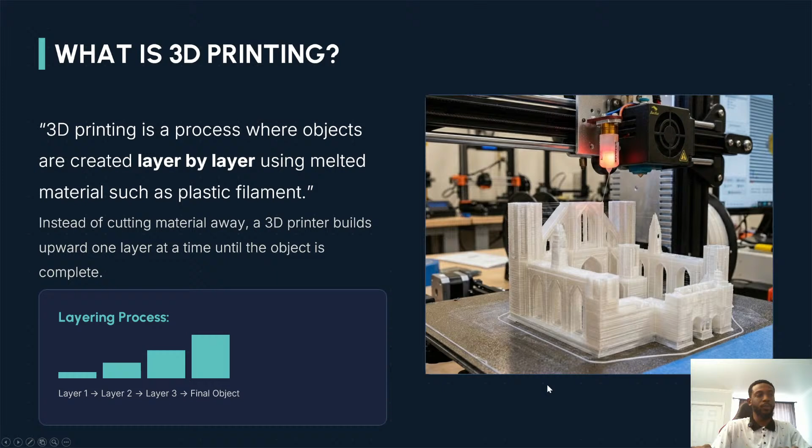So now we'll be talking about the various parts of a printer. This might be a little bit complicated, but I'll try and keep the explanations as simple and easy as possible.

So first of all, we do have the frame. The frame is what we call the structural support. The frame is also known as the structural support that keeps the machine stable and reduces shaking during movement.

And then we also have the Z axis, and the X axis and the Y axis. This simply means, so when I talk about the X, Y, or Z axis, think of it as motion, movements, or positioning. That's how the 3D printer moves.

So the X axis, this part moves the printer's head left and right. So that's what we're talking about here, it moves the printer left and right. And the Y axis moves the printer forward and backward. Just think of it that the X axis is left and right, and the Y axis is forward and backwards.

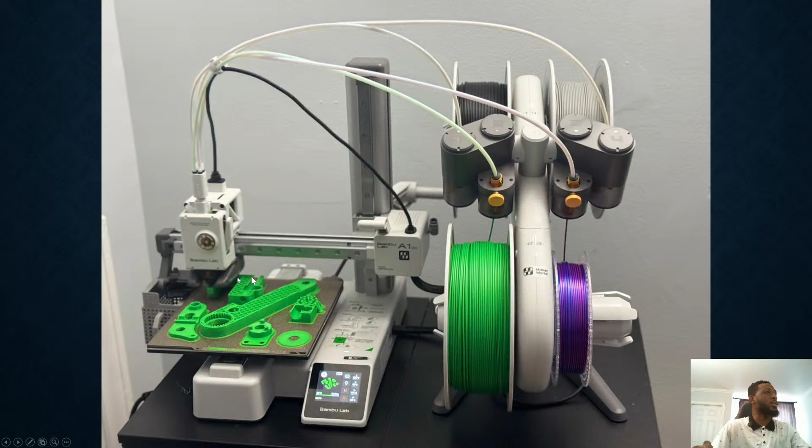I can show you a much more detailed picture of this. This would be something right here. If you can observe it, you can see the nozzle right here. This is the current printer that I am using, it's the A1 series. As you can see the nozzle a bit from the side.

So the printer that extrudes, you can see the green filament I'm using right now going through the tube guide, and it's going to be melted at the bottom here to make all of these parts that I'm going to assemble later.

So next we can talk about the heated bed. So when I say the heated bed, I simply mean this, the base, that's the base of the printer where the object is going to be printed on.

The bed actually changes temperature, which makes it easier to print and melt the material. Also makes it easier to take off the material when it's done.

So the bed is the flat surface where the object is printed on. If it heats up the plastic, it sticks properly and does not lift up or warp while printing.

So if it heats up properly, if the temperature is set to the correct degree, it sticks and makes the object adhesive to the base, because there's a lot of volume shaking and movement from the printer.

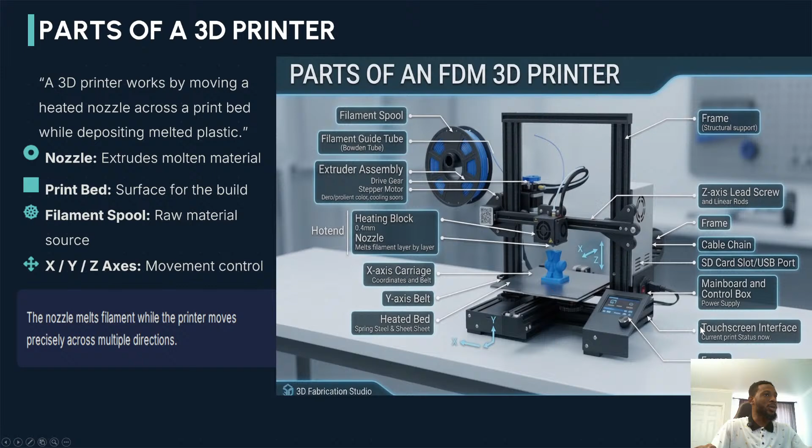But comprehend, with 3D modeling and 3D printing, you can have this printed in actual scaled dimensions, so you can observe and check for yourself if all the dimensions are correct, if all the parts go where they're supposed to go. Engineering prototype.

So engineering prototype simply means when you're testing out a building, or testing out a new machine, testing out a new product. You don't want to immediately jump into production. You have to make a prototype, you have to make a test first, and that's what 3D printing is mainly used for. It's mainly used to create prototypes for testing.

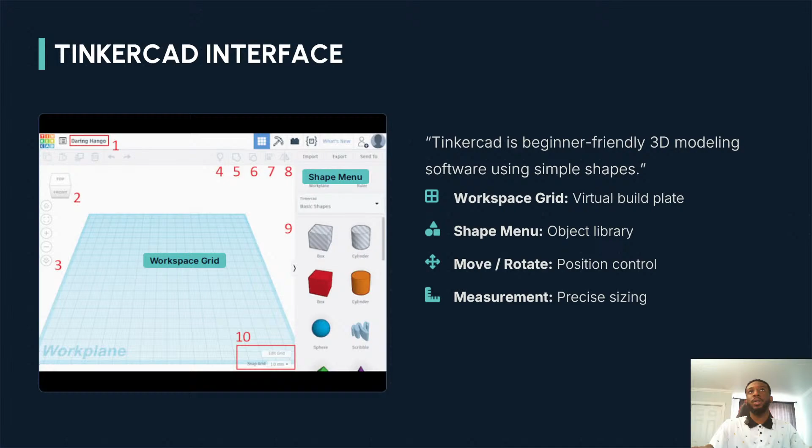Okay, so we'll start with Tinkercad right here. So when you open Tinkercad, this is what you'll first see.

Something like this. It's not very difficult to understand. I know it might seem like a bit much at first, but it's not difficult. It's a free software, so you don't need to pay for anything here.

So what is Tinkercad? Tinkercad is a free online 3D software that lets you design models. It's created by Autodesk, so the same developers of Inventor are the same people that made Tinkercad.

So it's a similar software, but this is mainly made for beginners or for those who just want to get into the hobby of 3D printing, or for businesses that want to make their own materials.

So when you get into Tinkercad and you go into design, you usually have three main sections, which is 3D, circuits, and code blocks.

So for 3D design, this is where we create the actual 3D models. And then for the circuits, this is mainly used for electrical simulations, like trying to test out if an electrical component is going to work and things like that. And then code blocks simply means using codes or programming blocks to model or create objects.

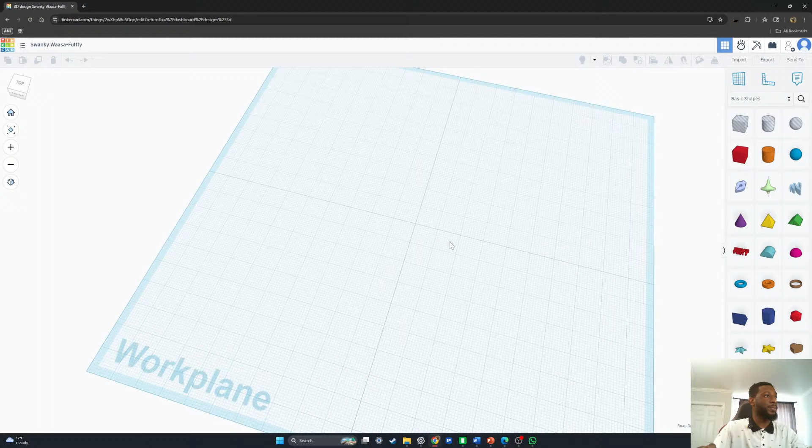And if you want to rotate, you hold right click, and then you just move your mouse either left, right, up and down, and that's how you easily rotate the work plane.

And understanding, if you want to reset the view, it's very easy. All you have to do is click on home, and it resets the view to the default view before you started making any changes, as you can see here.

So now we're gonna be adding our first shape.

Okay, so we're gonna be working first with adding our first shape. So what we want to do first of all is pick up the block and place it. Just left click on the block and you drag.

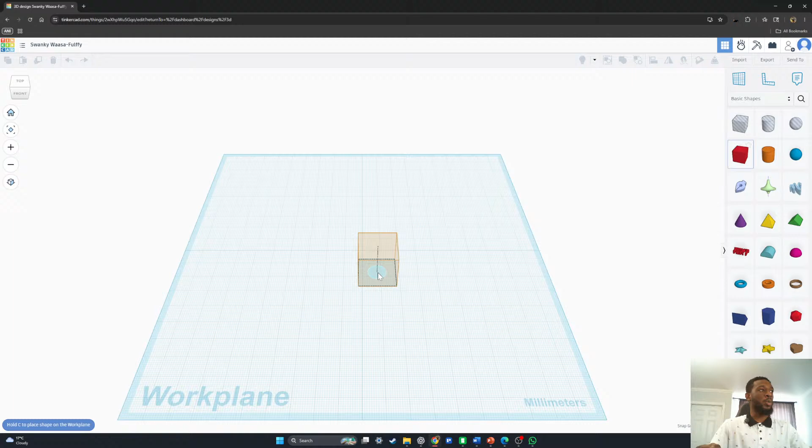You left click on the block and then you drag and place it directly anywhere on the work plane and then you release. So there you have your first basic shape.

So everything in Tinkercad starts with a basic shape, and from there you can create more advanced shapes by adding more and more basic shapes and changing how it looks.

So if we look at the shape handles, these are what we call handles. This lets you control the width, the length, and the height. So with this, I can control the height of the box.

All I need to do is left click and hold and drag, and you can see the size is increased, the dimension changes.

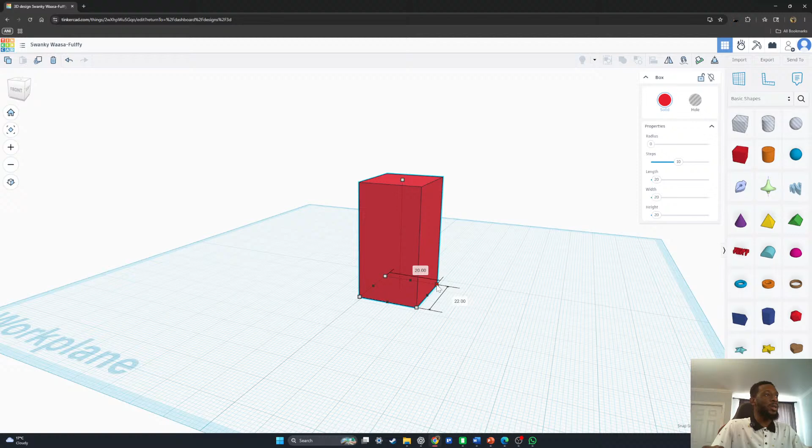If I want to change the length, all I need to do is hold this, left click and hold and drag. And that's how I'm changing the length.

If I want to change the width, I'll pick this handle right here and drag it. That's the easiest way of changing the width.

Another way is when you select the object, most times I'll advise you not to change dimensions by dragging. It's much better, and it will always be better to use precise dimensions.

So when I say precise dimensions, I mean when I click on this, I can easily change the width. I can make this, instead of 30 and 20, put an exact precise number, make this 20. See, and that changes.

If I want to change the length, when I hover over this part, I can see the dimensions. All I need to do is click on the dimension and change this. This now says 40.

The same thing with the height. If I wanted to change the height, all I need is to select this. Instead of dragging, I will input a precise number, and we can make this a height of 30 millimeters.

Now, when it comes to changing your parameters, I mean your metric, your units. So we can either use the metric or the imperial. The metric lets you use millimeters, centimeters, or meters, and then the imperial, which uses inches and feet.

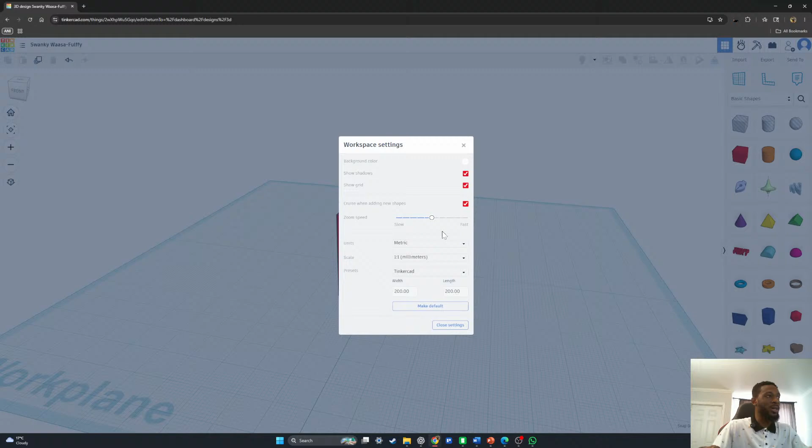So for today's class, I'll keep it with metric, and we can use millimeters.

So with the handles, you can also rotate objects with the handles. Each of these handles lets you perform a specific operation. If you look at this right here, where it looks like it's about to rotate, this is how you rotate a part.

So all I need to do is left click and hold and move this. And you can see it says 45 degrees, 22.5, 67.5, 90 degrees.

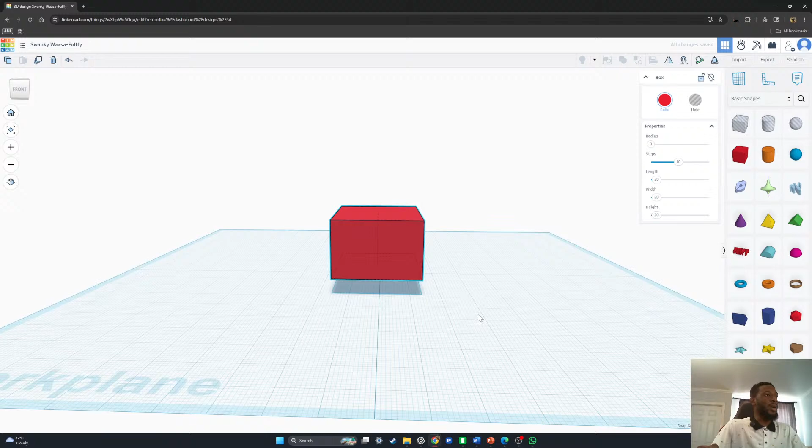So now another thing I want you to take note of is when I place this in front of you, you can see it's not on the base of our work plane. And if we send it to the printer like this, there's no way the printer can print a floating object. You can see the shadow right here. So we don't want this. You have to always ensure that your object or part is directly on your work plane.

And how do we do that? We go back to the handles. Like I said, the handles let you operate or change most of these things. So for example, the easiest way to do this would be with this handle right here.

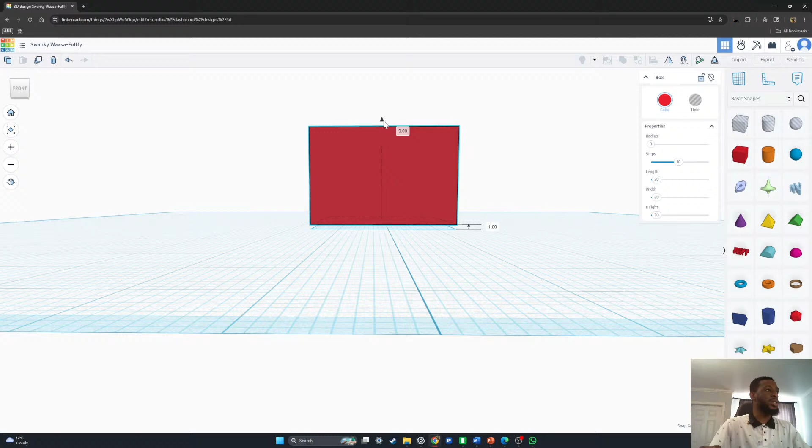So with this, I can easily move it up, and you can see it's 7 millimeters away from the work plane. And I can take this down - it's 1, and then 0. Or you can take it below the work plane, but we don't want to do that. We always want to ensure that our object sits directly on the work plane, unless it's a job specific requirement, which I highly doubt there will be a lot of.

So another way you can make changes without using the handles or these points is by using the property box. So if you look at it from here, we can change the length using this. So when I drag this, see, it moves. And then I can also change the width using this, as well as the height.

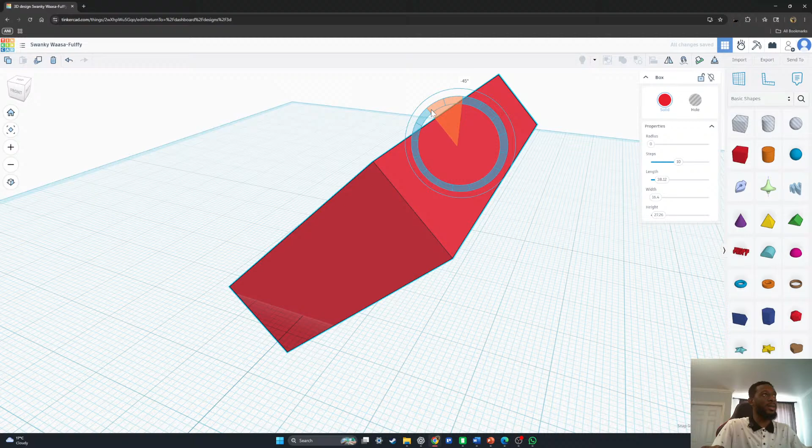Okay, so the reason why it looks like this is because if you remember, we rotated this 90 degrees. So now the height is facing this way now. So if I take this back, you can see now the height increases, just like we wanted. And this increases the width, and this increases the length, just like we want.

Another function that you can find here is the radius. If you want a rounded corner, all you have to do is this, and you can see it's no longer a sharp point anymore, but instead it's now rounded at the corners. So that's what the radius actually does. If I wanted to make this a whole, the larger the radius, the rounder the edge is gonna be.

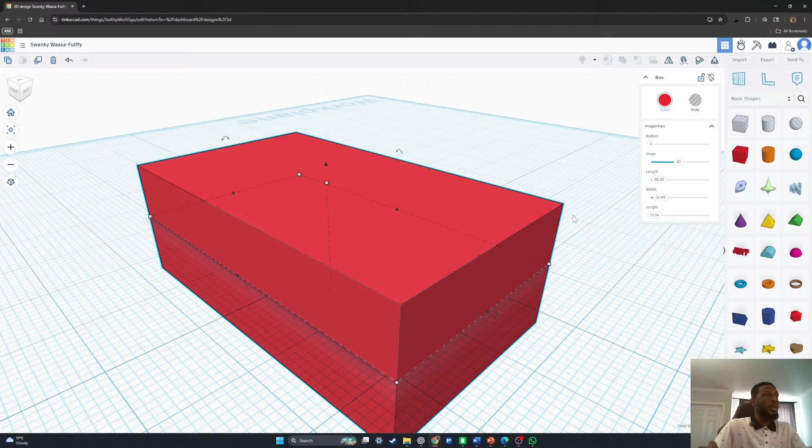So next we're going to be looking at basic duplication. Say you wanted to duplicate this object. The easiest way would be to come over here and use this duplicate function right here. Or you can use copy, but using duplicate would be better.

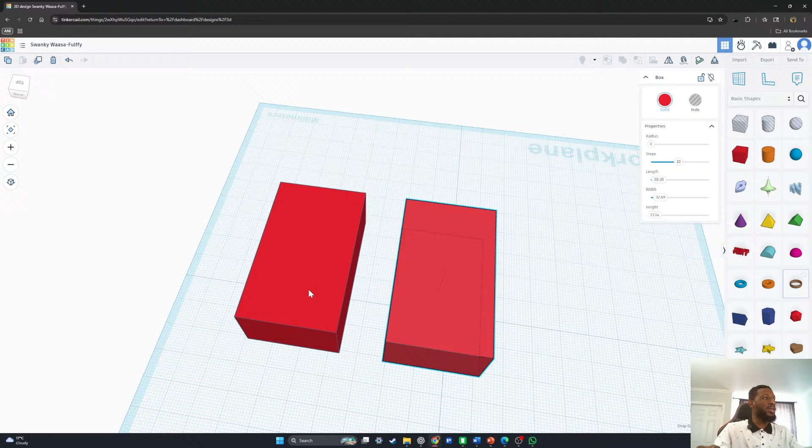So when I click on duplicate, it's already been duplicated. All I need to do is drag this, and I have two. So if you want to create an object that has an identical copy, this is how you do it. It's very easy. And if I wanted to, I can select this again and make another duplicate. Just like that, we now have 4.

And just like that, we now have 4. So next we'll be looking at the undo and redo.

So in case you ever made a mistake and wanted to make a quick change, the easy fix would be to undo most of the changes right here. And if you wanted to take back the change, you can redo it and have it all added back. So the interface is pretty straightforward and actually very easy.

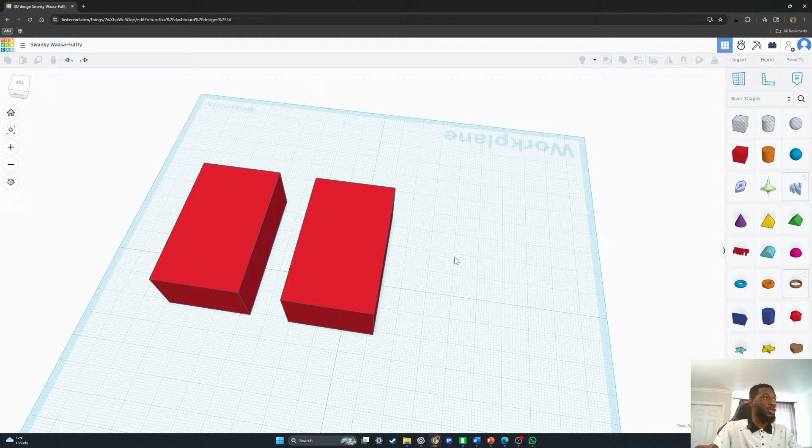So now the next tool I want to observe is the text tool. So I'll delete this, have it deleted, and then the text tool is right here. You can see it right here. All you need to do is left click and hold and drag.

So now Tinkercad lets us edit the text from this box right here. So all you have to do is change the text.

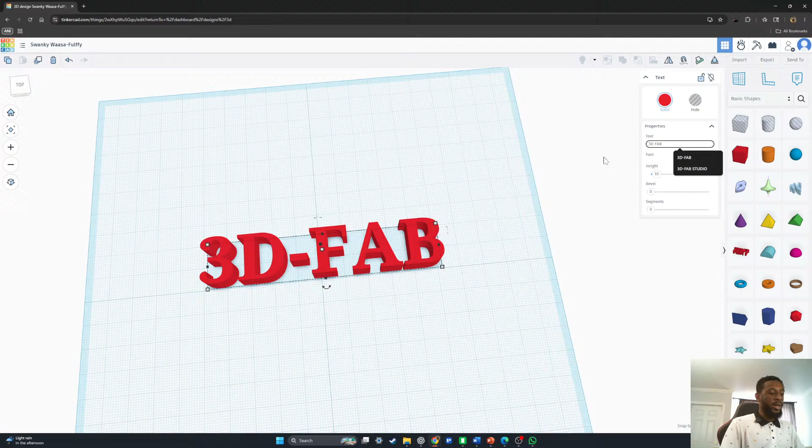So we can say something like 3D Fab Studio. Yes, something like this. So that's how you change the text.

If you wanted to change the font, you can do that here. So if I wanted to use this, I can use that instead. If I wanted to change the height, the same way we changed the properties of the cube earlier, we would do the same thing by adjusting the height, making this a bit higher if we wanted. It's always better to use text, typing in the actual dimensions.

And then for the bevel, it depends on how thick you want it to be, as well as segments.

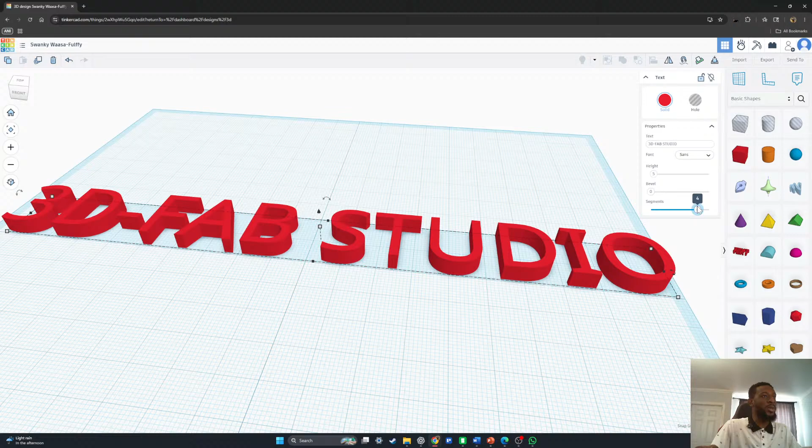So that's the easiest way to add text as well as edit the text, and also changing the fonts. So that's where Tinkercad makes it very easy for us to do this. We can also change the thickness and change the size.

If you wanted to change the size as well, we can also change the size using the handles or the points, just dragging it this way. It's one of the easiest ways to change the size.

So now we'll also talk about the grid. When I say the grid, I'm talking about these points right here. This is what we refer to as the grid. We can change each of these.

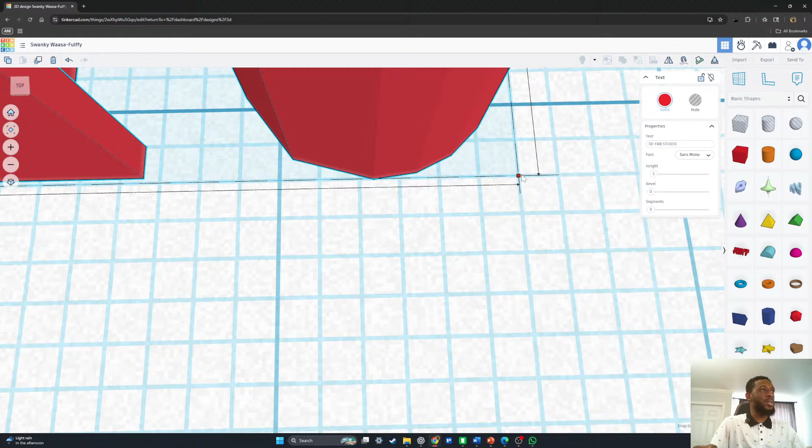If you observe this, I'm going to zoom in and it snaps into the grid at 1 millimeter. So as you can see, each of these blocks is 1 millimeter. So from here to here is one millimeter. The same thing from here.

So if you wanted to change this, all you have to do is go here and increase the snap grid. Let's say instead of 1, we wanted to make it 5. When I do that, it simply means that instead of snapping one grid at a time, it's going to snap 5 millimeters.

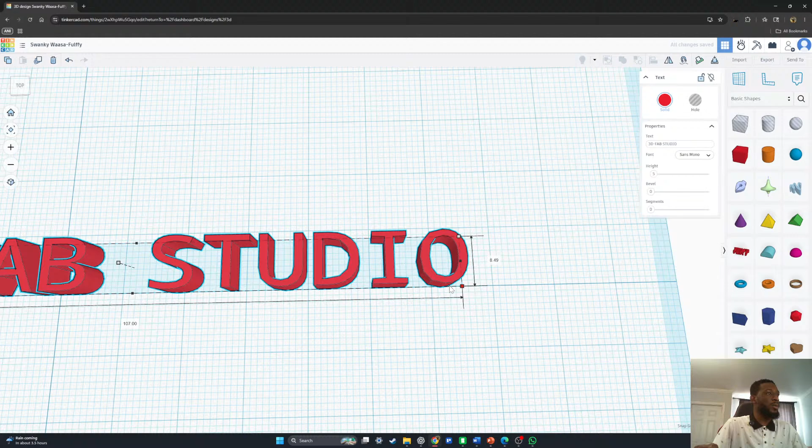Just like this. So 1, just like that, just like that. So instead of 1 millimeter, it's now going 5 millimeters instead. But for this class, we'll keep it at 1 millimeter.

So that's how you control the grid movement and the placement of your objects. 1 mm gives a finer movement, so larger values move the object faster. So if you want to move an object faster, you can increase it to 5 mm and so on and so forth.

So now the next tool that I want to talk about is the ruler tool, and for that I'll place a block right here, and then we pick up the ruler tool. When I say a ruler, I mean a measuring tool, which is what we see right here.

For most tools on Tinkercad, all you have to do is hover over the tool, and it usually gives you the name of the tool, what it does, and any other detail you may need. So all I need to do is left click, hold, and drag.

You can drag and place it next to the object, or you can place it anywhere on the grid on the work plane, and it will give you the measurements.

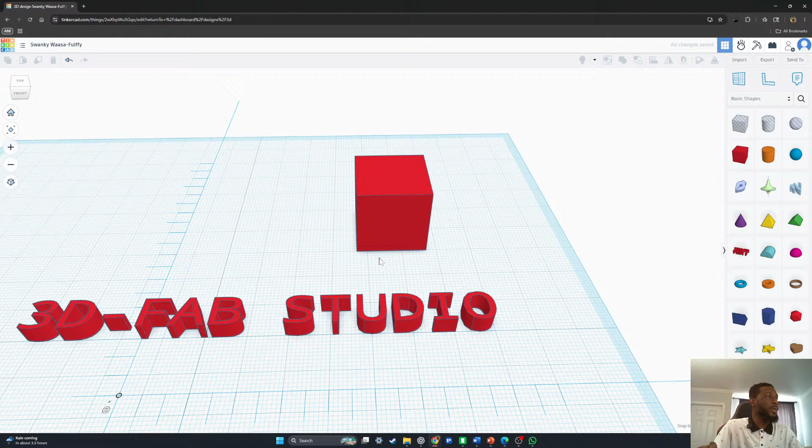Now all you have to do is click on the part that you want to be measured, and it automatically gives you the detailed dimension of every single one.

If I want to see the measurement of this, all I'll do is click on it. You can see the height is 5mm, the width is 107mm, and the length is 8.49mm.

You can also figure out the distance from the object to the work plane. As you can see, it is 2mm above the work plane.

That's basically what the ruler tool is. It's used mainly for measuring and to ensure accurate dimensions. I advise that at every point in time you should always make use of the measuring tool, because it's very important.

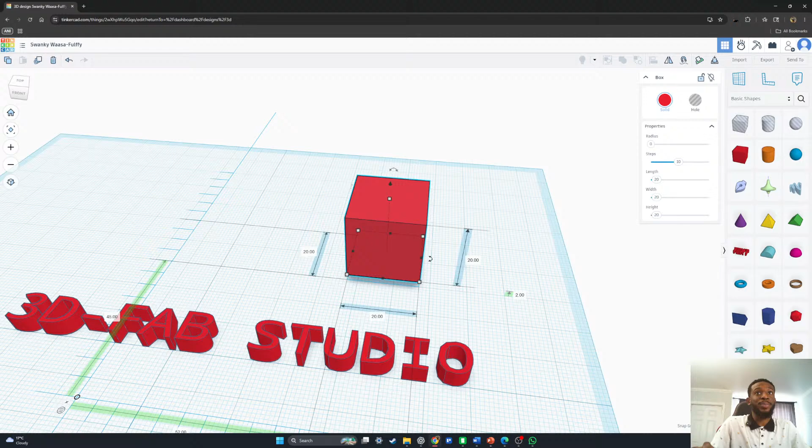Next, we're going to be talking about grouping and holes. So when I say grouping, I mean combining two objects. I apologize.

If you wanted to take off the ruler, all you have to do is click on the X to dismiss the ruler, or click on the ruler again. That's all. That's how you take off the ruler.

Now I'm going to be talking about combining multiple objects. Let's say this is our first object, and now we have another one. So grouping simply means combining multiple shapes into a single object.

First, I'm going to be looking at adding another object to this. We'll left click on this. Let's transform this into a sort of basic house.

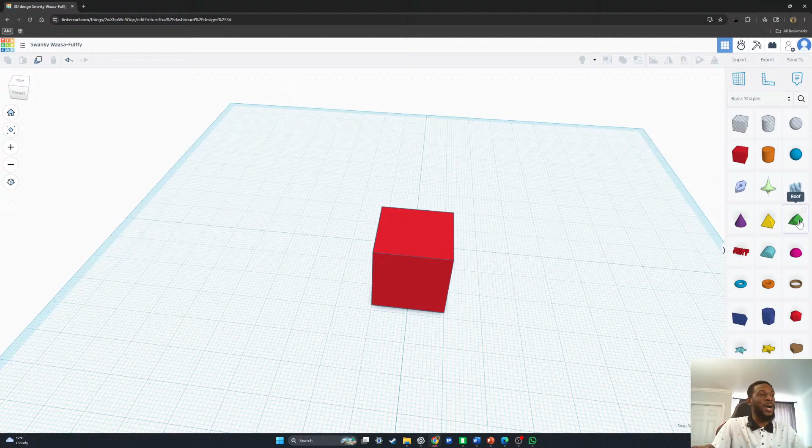So I'm going to pick the roof, left click, hold, and drag. What I want to show is that Tinkercad makes it easy to place objects. I want you to take note of this.

I want to place this on top of this. So when I move it closer to this object, you can see immediately it changes from blue to orange, which tells me that I'm about to place this object on top of another, on top of this plane.

So all I need to do is release it, and you can see it's on top of it. Now all we have to do is arrange this.

Make sure it sticks, and I would like to increase the length of this, make this a bit wider.

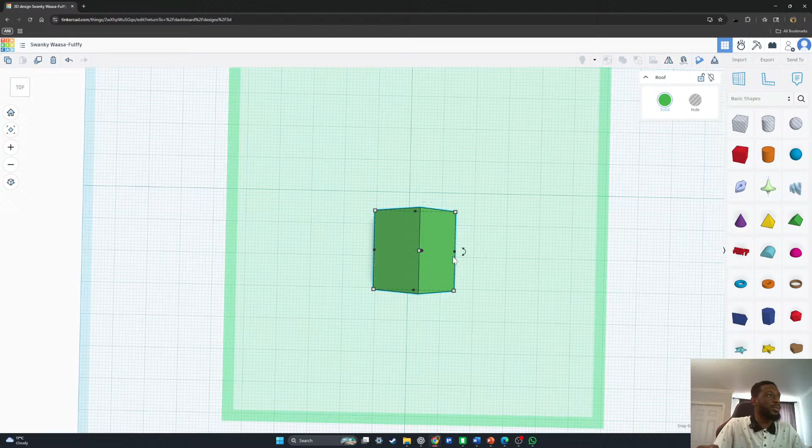Perfect. Should be good enough.

Okay, so now these two objects are not a single object. So if we're going to send this to a 3D printer, the 3D printer might return an error.

So in order to avoid that, let me show you an example. Just because you place this object on top of this does not mean they're all the same. If I move this, you can see it only moves the cube. I'm going to undo this.

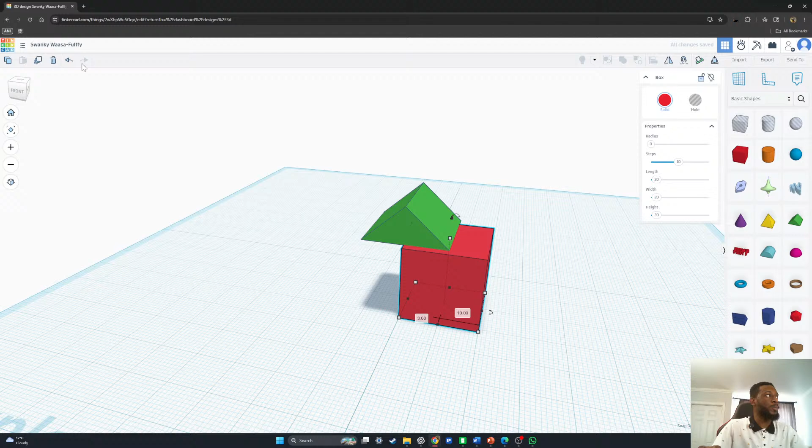So now if you want to group an object, all you have to do is select all of it. If I want to select, I have to left click and hold and drag across the objects that I want to select.

So when I do that, take note of this. You see it right here: Union group. It shows you what it actually does. It groups the objects and makes it a single piece.

So when I do that, this object is now a single piece. So that is what grouping is.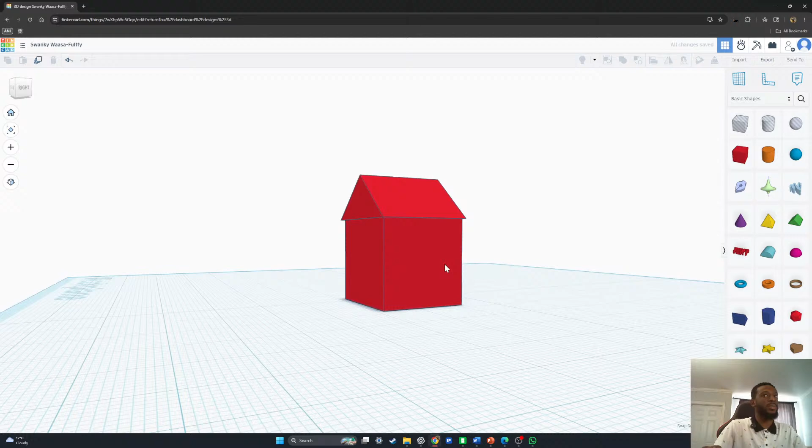So you must always group any of your objects before sending it to the 3D printer. Very, very important. It's a step you should not miss, because we do not want the printer to think of each of these items as individual items. Instead, we want the printer to think of this as a single item or a single object.

So next, we're going to be talking about converting a cylinder or a part to a hole. When I say converting a cylinder to a hole, this is simply what I mean: if I add this box, I will reduce the height of this and increase the length.

And if we wanted to add a hole to this part, I can pick this cylinder right here, drag, and drop it here. So now I want you to take note.

Right here in the properties, we have solids as well as hole. For solids, this makes the part a solid unless you change the color as well. This does not affect the printer, but it's only a design process. So it's only for Tinkercad.

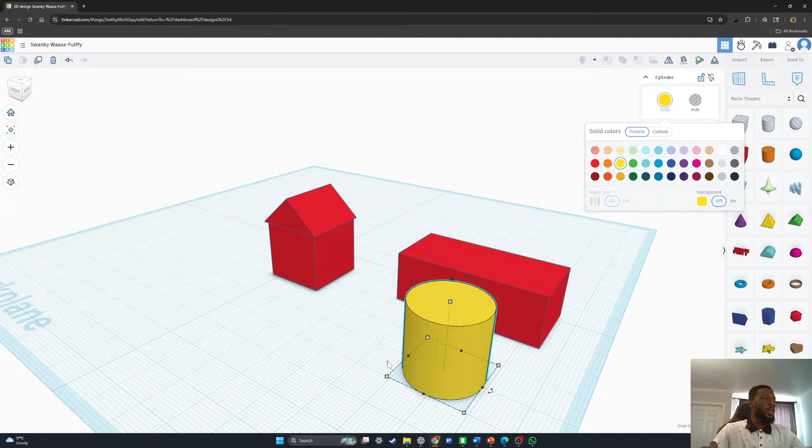What I mean is just because you colored this yellow does not mean that your printer is going to print this as yellow. That is basically what it means.

Also, as well as changing the colors, you can either make it transparent or not, or add a multicolor. But we're not focusing on the colors for now.

What we want to focus on is the hole. So if I wanted to create a hole in this rectangular cube, what I would do is first reduce the size of our hole.

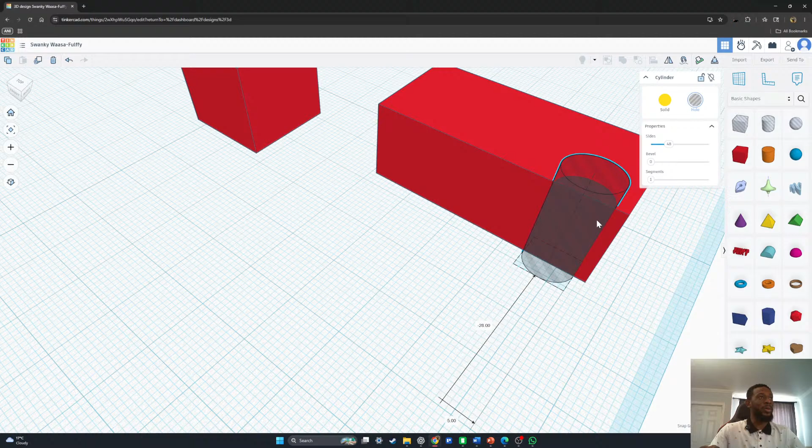What I would do is click on hole. As you can see, it turns it into a gray shaded out part. What that means is that this entire part - all I need to do now is put this here, and then select both parts and group.

Look at that. So you see, now we have a hole right through the middle.

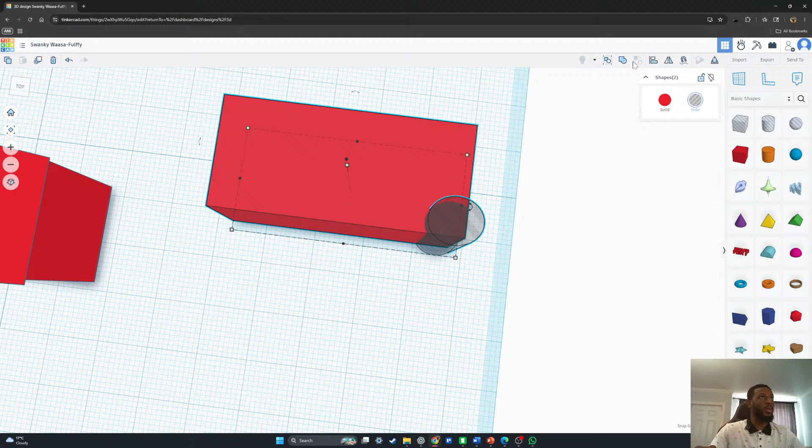So what it means is that this shape is gonna take whatever cuts out from this material. So that is how you can effectively cut out or create holes in a part. So when I group it, you can see it right there.

And this is one of the most powerful tools on Tinkercad, because instead of adding material, it lets us remove material. So that's what the grouping actually is.

So think of it as subtracting shapes. An easier way to think of it is to think of it as subtracting this shape from this. So whatever size you make in this scenario is what you're going to subtract from this cube, from this rectangular cube.

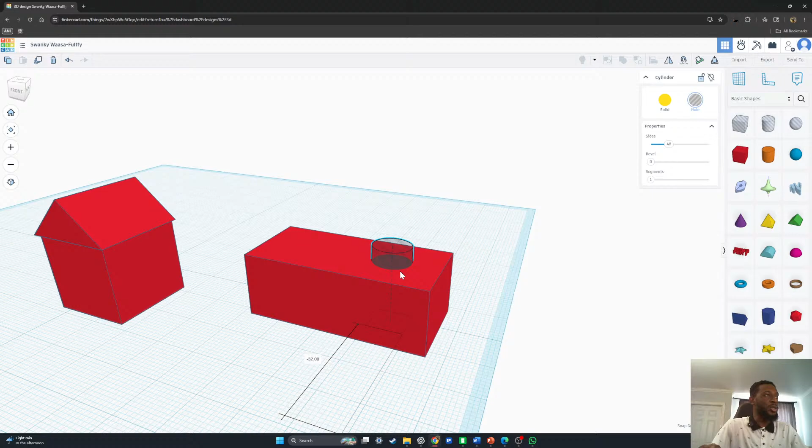Just think of it that way. Think of it as subtracting a piece from another piece. So all I would need to do is group this again, and top view, right there. You can see it.

Now, this doesn't only work for the cylinder. It works for nearly every other shape that you can possibly think of.

Let's say, for example, I wanted to put a door, a makeshift door on this, or a space for a door where a door is going to go through. All I need to do is pick a block. I'm going to reduce the size of this.

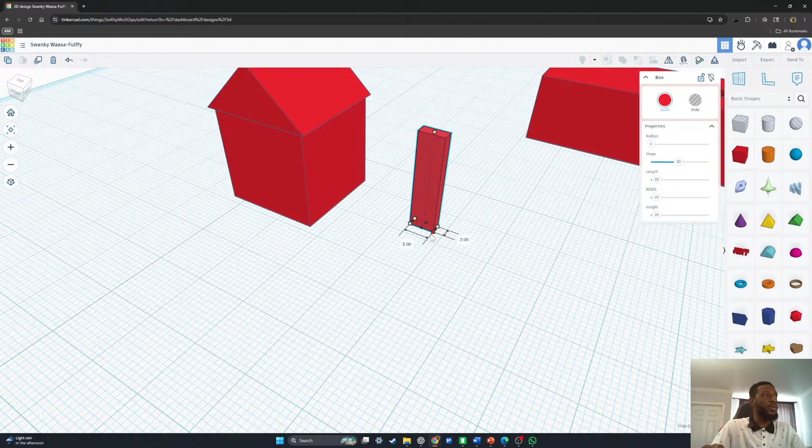Reduce the size of this quite a bit. And then, just like we did with the cylinder, every basic shape has a solid as well as a hole. So all I would need to do is click on the hole, and then add this into the shape.

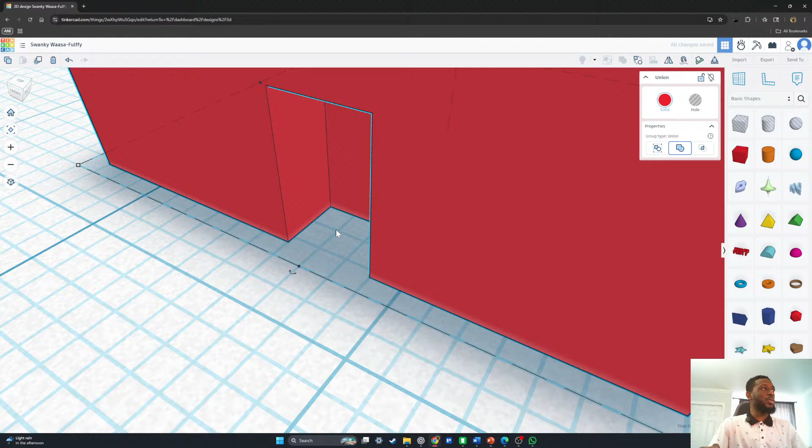And now the next thing we do, like usual, we group. And just like that, you have a cutout subtracted from the part that we made. So like I said, think of it as subtracting this from this.

So if you were going to make a whole spacing for a door, you have to make sure that this follows an exact dimension. But right now we're just using a random dimension to understand how each of these shapes work hand in hand together.

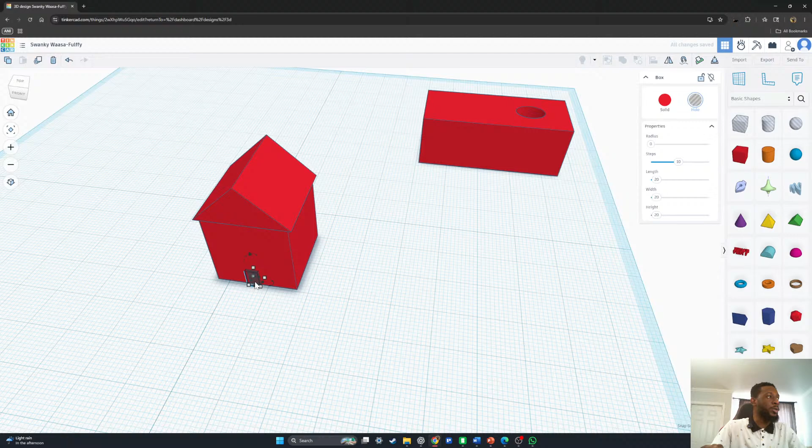So I'll group this again. If I wanted to make a corridor, all I would need to do is make sure that this is longer than this, and then you can group it, and just like that, you have a hole created from the subtracted part that we made. So that's why I said it's one of the most powerful tools in Tinkercad.

So next, using all that we have learned, we are going to combine all of the basic processes to create a project, a keychain that we're going to send to the 3D printer for printing.

So I hope you guys can follow me. I'm going to try and make it as easy as I can. It is easy, but I will try to make it as easy as I can. So you should not be discouraged. I really do hope that this gets you all interested in 3D modeling, because that is the goal of this session.

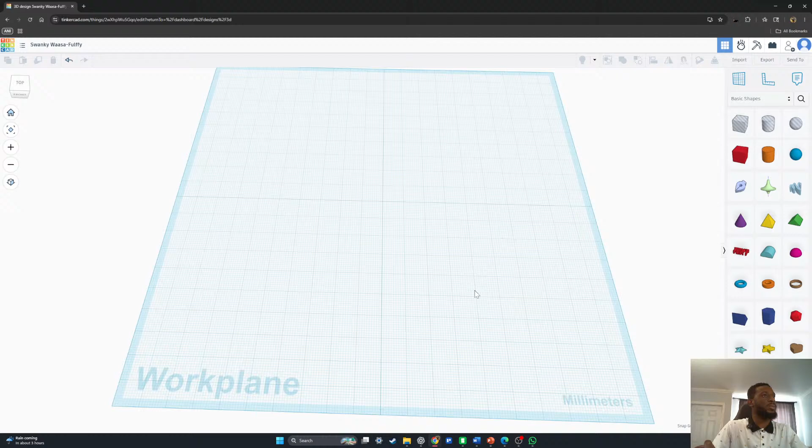Now, so the first thing we're going to do is, for the keychain, I'm going to switch over to the 3D printer if I can. I just really want to show you the physical keychain first of all before we get into any design.

Okay, so the first thing I would do is, before we create our keychain, I'll be changing this to the printer cam.

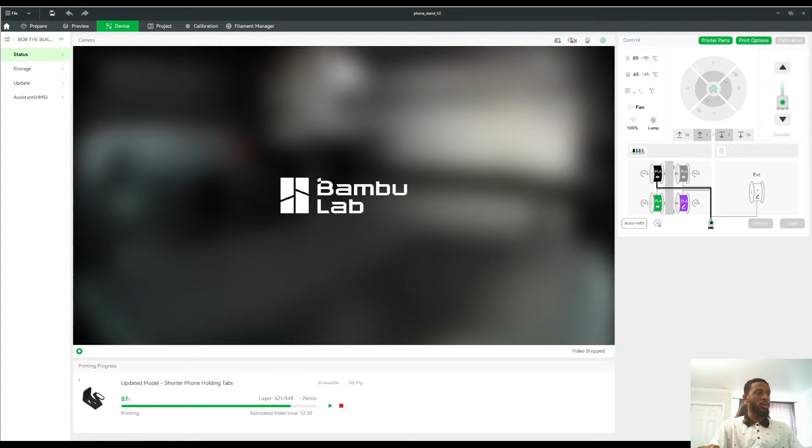Okay, so this is currently the printer I have now. It's currently working, there's something currently on the printer. But this is what we're going to be making, something like this.

Okay, so we're going to be looking at this with a more intricate design.

While the printer is still working, because right now it's printing a phone stand that was designed. If I show you what it's making, this is what the printer is making. It's a phone stand.

After all of the design is done, it's sent to the slicer. So if I turn it back to the printer cam, you can see it's working.

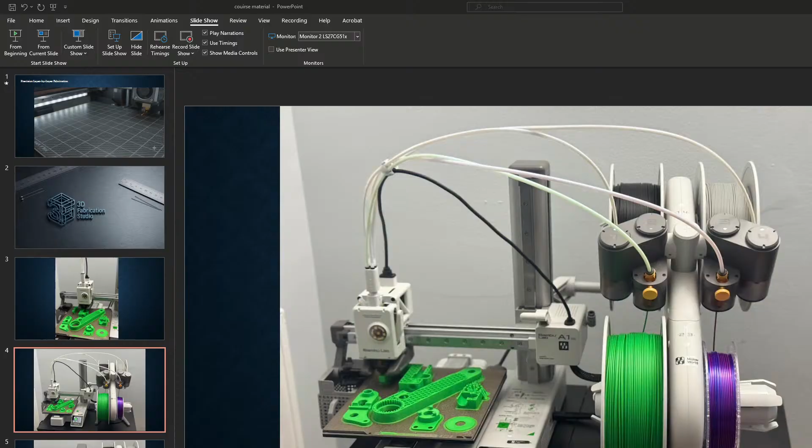All right, so we're going to go back to the main course. And now that you've seen the keychain we're going to be making, we'll proceed with making the keychain.

So first things first. The first thing we need to do is add a rectangular cube first of all, the basic shape. So let us add the basic shape first. When this is added, it will make this, let's say,

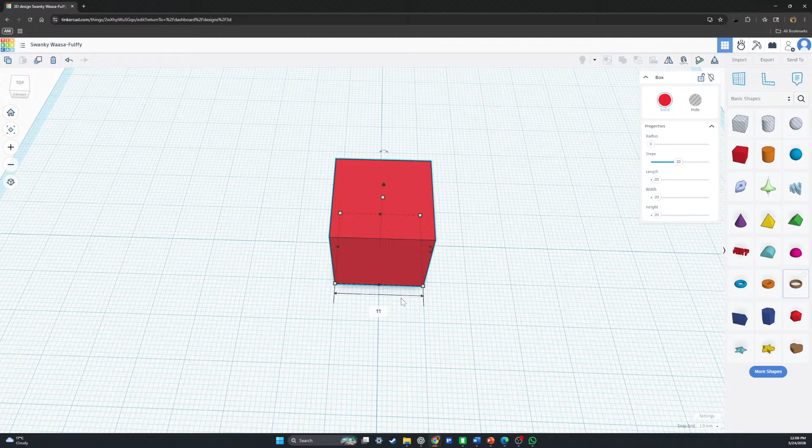120 in millimeters for the width. Let's try 110 first. Okay, make this 110 millimeters.

And then for the width, I believe 20 should work. Make it 25. And then for the height, I don't want it - we don't want the keychain to be too thick. So let's say maybe 5 mm, or maybe 4.

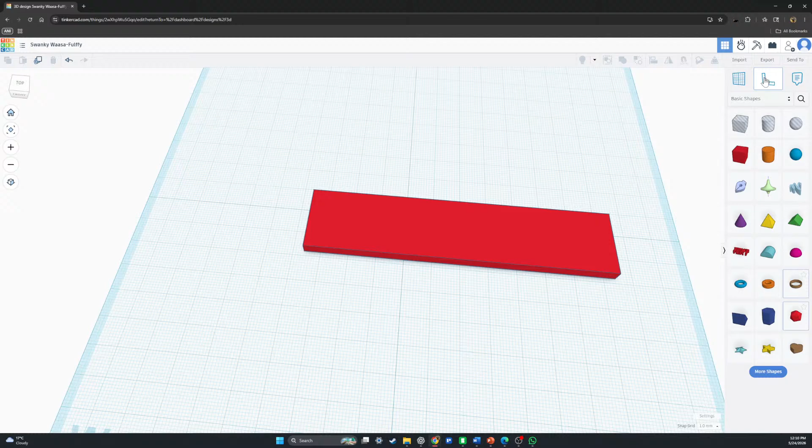So now if we put our ruler just to confirm all of the dimensions: 25 for the length, 110 for the width, and 4 millimeters height. This should work perfectly.

So now the next thing we're going to do is give this a radius, because we don't want a sharp edge - a sharp edge is very easy to get injured with. So we want to have all of the edges rounded off. So I can make the radius a 2, and you can see the change.

If I wanted to make it a bit straight, I can make it a 1. But I think a 2 should work fine. So I'm going to select that.

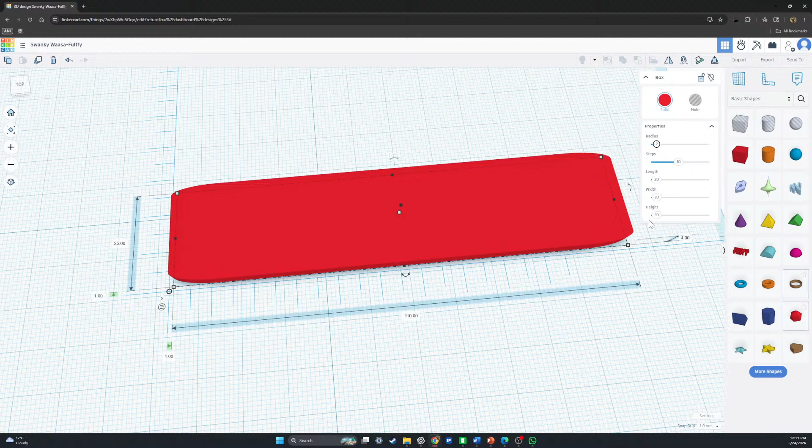So now we can observe all of our dimensions and make sure that everything is accurate.

So now the next thing we're after confirming the radius and everything you need to do, the next thing we're going to do is add a text to customize this keychain.

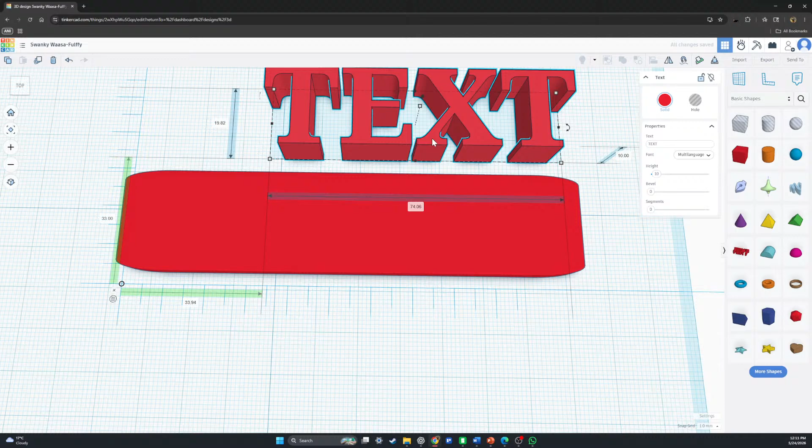So the first thing we do is drag this and place it on our keychain. And then we'll change the text to say something like

3D Fab Studio. Now, as you can see, this text is too big to fit on this, so we're going to have to change the size of this.

Alright, so now there is something I would like to show you, an error that I encountered when printing the first keychain. I'll switch to the printer cam now, just to show you what I mean.

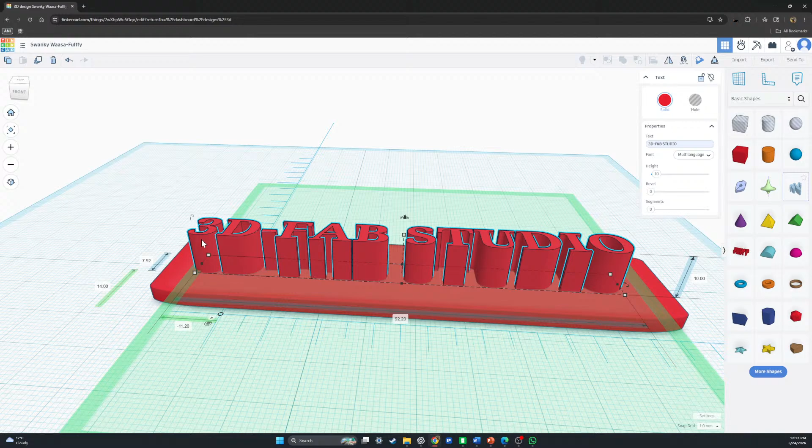So the first problem I encountered was the height of the text. It was too high to begin with, so we're going to reduce this and make this

maybe 4. So the first keychain I printed, this was a bit too high, and it did not look very impressive. It felt more like a name tag rather than a keychain.

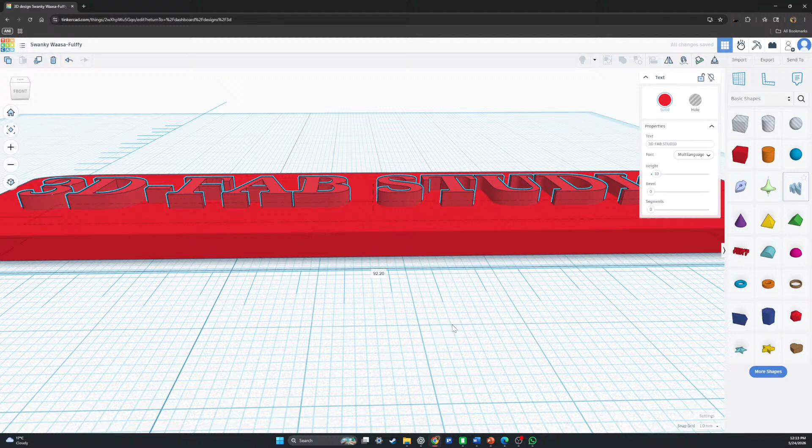So I don't want this to come up too high. I'll put this in and then observe the bottom, because we do not want the text to come from the bottom as well. So you have to be mindful when you're in the design phase.

And when I say I don't want it to come to the bottom, this is what I mean. Something like that. Or even something like this. Something like this, it's not good.

Right, so this is good. This should work perfectly.

If I wanted to reduce it even more, I can say 2.5. And then send it a bit lower. Yes, this is much better.

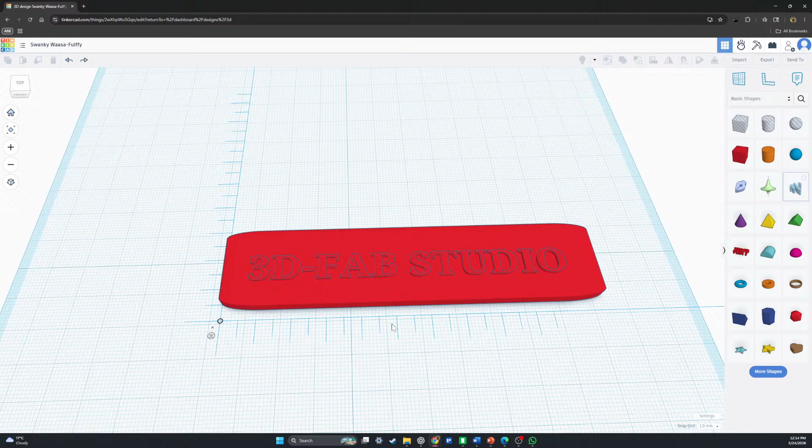Now just increase it a bit just in case. Now the next thing that we'll do is make sure we get the positioning right.

And now I wanted to add the hole, the actual hole where the keychain is going to go.

So now we can reduce the size of this, because we do not want it to be too big. And when we turn this into a hole, this is what we get.

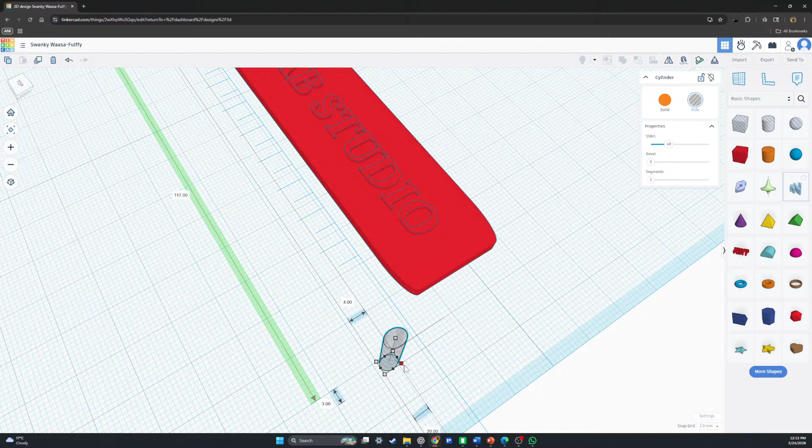All you have to do is place this right here. And then we want it to go all the way through, like so.

Exactly, perfect. So now the next thing I want to do is add a bit of a groove design to the front and the back. It would look something like this.

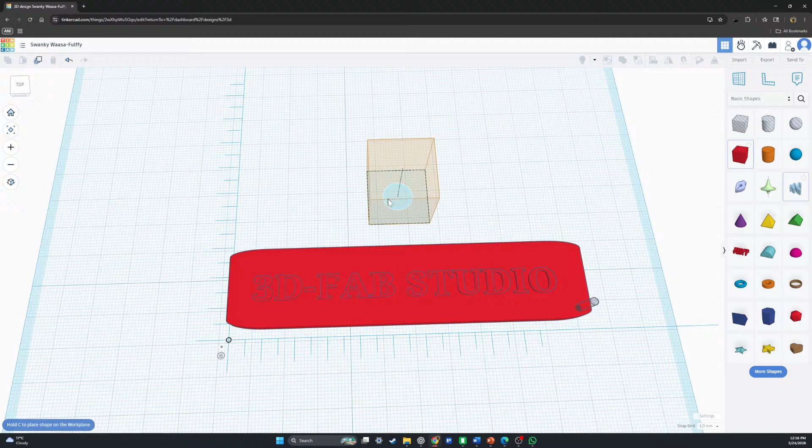So first of all, we change the length as well as change the color of this, just so I'm not confused. You change the color in the design phase so you don't get confused if all the parts have the same color.

So I'll take this, and then I will reduce the height, also reduce...

All I want to do is pick this and place it right here.

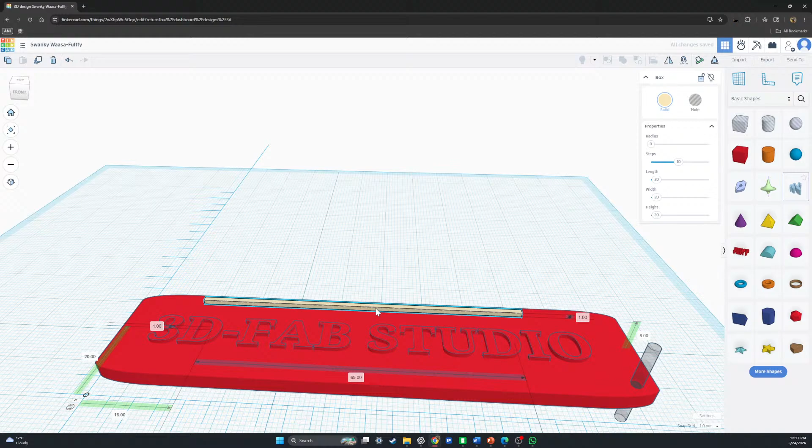So the more you do this, the more advanced you're gonna be.

And then I want all of these to group.

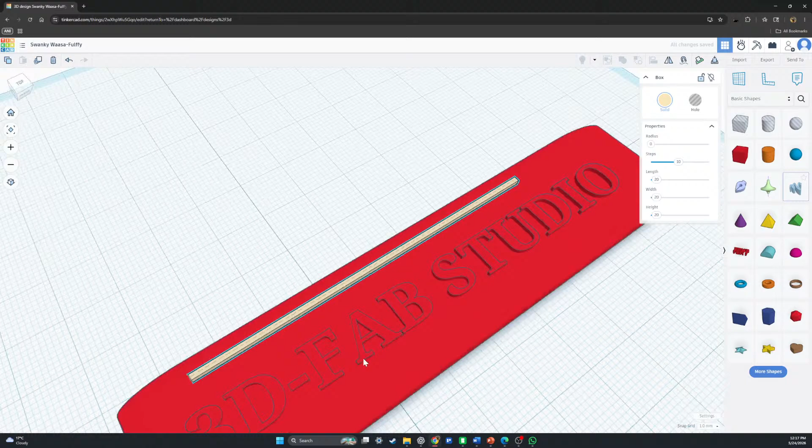I'll make this a bit longer. All of this is just aesthetic design.

And then I want to duplicate this.

Duplicate this and group both of them together, so that when I move one, I'm also moving the other one, like so.

So if I extend the length on this one, the other one's length is also going to extend as well.

Now all I need to do is send this down and give it a hole. So it's going to make a little wedge right here.

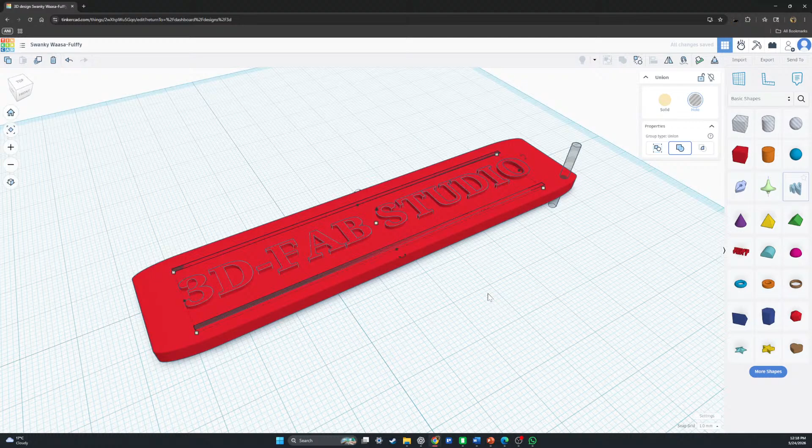So when all that is done, all we have to do now is group all of them together. And when we do that, you can see we have our hole. We also have our groove.

So when you get to the stage where you are nearly done, you can observe for any mistakes.

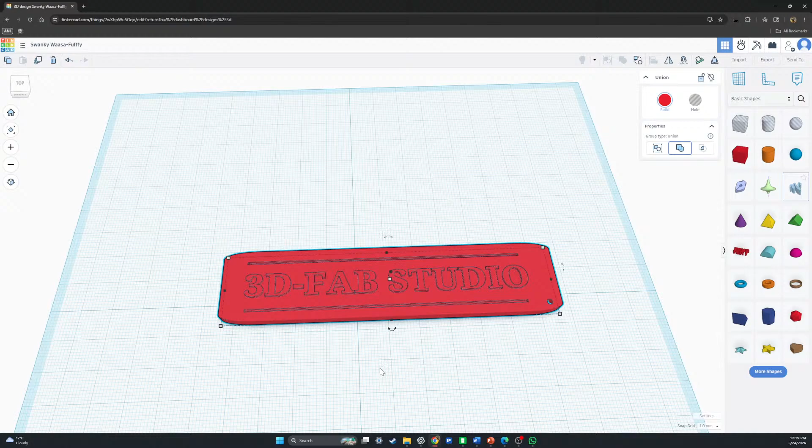Good. So now the next thing we're going to talk about is exporting this file and sending it to the printer. The 3D printer uses a file called an STL file.

Someone was asking in the chat, how do I undo a mistake? And how do I make sure the keychain is the right size before printing?

Well, if you want to confirm the size of the keychain before printing, there isn't really any universal size for a keychain. All you have to do is determine the size of the keychain you actually want, and then give it the size.

So for me, I wanted a keychain that was 110mm long, 110mm wide — sorry, if I put up the ruler here to make it easy — so I wanted a keychain that was 110mm long, with a 5mm height, as well as a 25mm width. So that's the parameter that I wanted to use.

For you, it can be different. You want a keychain that's different, maybe a keychain that's smaller, shorter, so there's no universal size.

And to undo a mistake, all you have to do is click undo right here. You can see the tab right here. If I undo, and redo.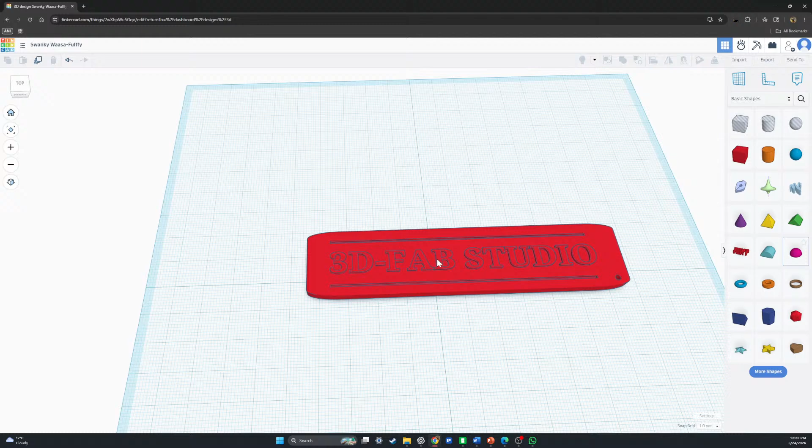So first of all, you want to change the name of this saved file. By default, Tinkercad always saves any project, and it always uses a funny name or a weird name, or however you want to put it.

But you can change the name by doing this. All you have to do is click on this, and you can change the name. So I will make this 3D Fab keychain, and then I'll save this, and then I'll hit export.

So when you see export, you want to click .stl file. This is the actual file that we need. So when I click .stl file, it saves it, and then 3D Fab keychain, saved.

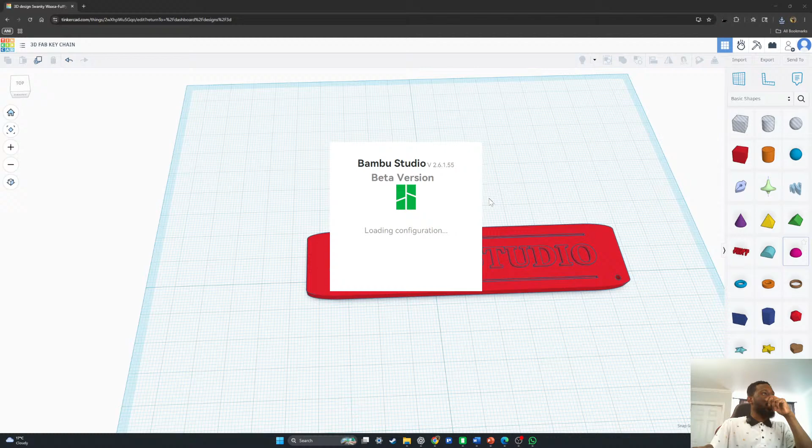So all I need to do now is open this. It's going to be open with Bambu Studio. So now we're going into the actual 3D printing software.

So now this is the actual software itself. Right here, it's called a slicing software. And what is a slicing software? A slicer? A slicer converts 3D models, which is this, into printable layers.

So which means currently right now we cannot print this as it is from Tinkercad unless we send it to a slicing software. And the slicing software is the 3D Fab, the Bambu Lab Studio.

There are a lot of other slicing software out there. We have Cura slicer, but this is the one that's inbuilt with the printer that I'm using.

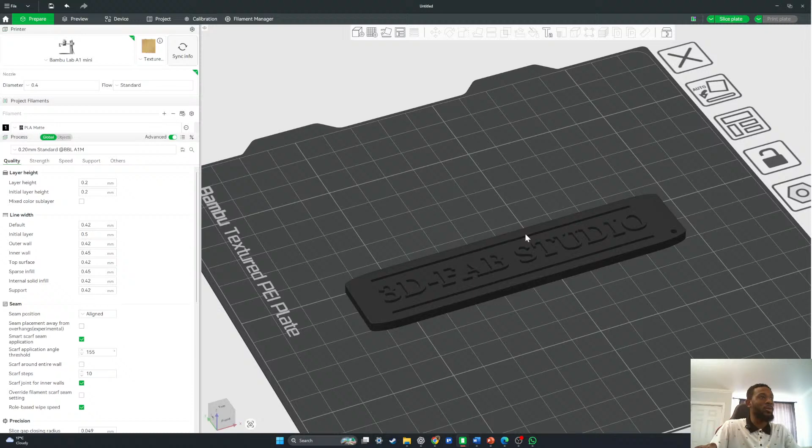So from here, you can actually see all of the designs that we did, as well as the grooves and the holes.

This bed you're seeing right here represents the actual printed bed. It actually represents the actual size of the printed bed. So if I switch to the printer cam, that's what this bed is. The bed you can see that part on, it's represented by that part right there.

It's the actual size, so it lets you get an idea of how big or how small this is going to be on your printer.

I'm going to leave most of these as defaults because it's usually set up to confirm for the best possible print. Most of the time you don't need to change a lot of this besides the speed. Even changing the speed might affect how your print looks because you don't want the printer to go too fast or too small.

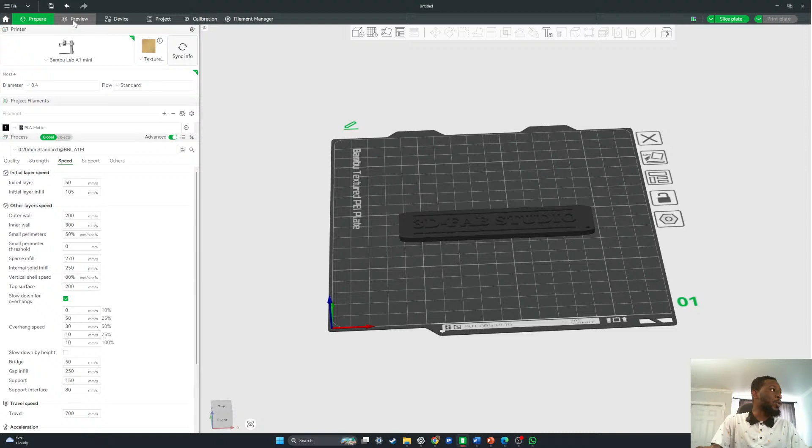How long does a small print keychain usually take to print? Don't worry, I'll show you. If I go to preview right now, you will be able to see the time it's going to take. Model print time, 18 minutes. So it's going to take 18 minutes total to print. If you add the setup of the printer, it's going to be 24 minutes.

That's how this shows the layer of the prints. So if I take this down, you can observe the material. That's what we mean by layer printing. It's going to print the first layer, then the second, then the third, just like that.

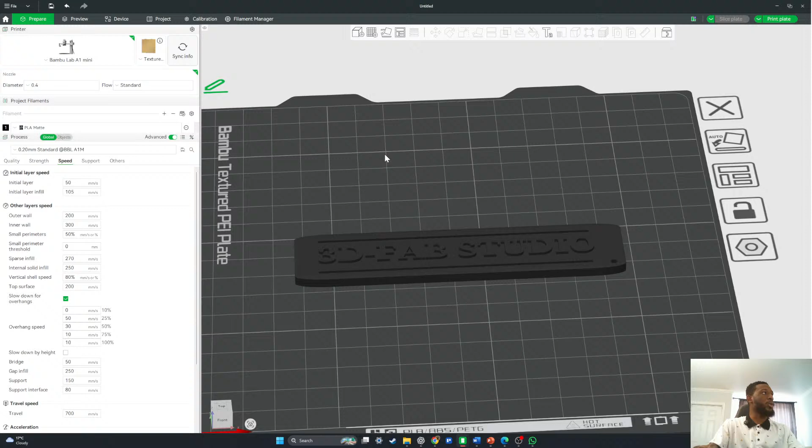So if I go to preview, I wanted to change the color of the name itself, because I don't want it to be black since it would be overshadowed by the background. So what I'll do is click on this and then go into color painting.

So I want to add another filament. Currently on my printer, I have 4 filaments installed: black, green, purple, and gray. If I switch to the printer cam, you can actually see the 4 filaments right here - purple, green, black, and gray. So you can see all of the filaments which I use.

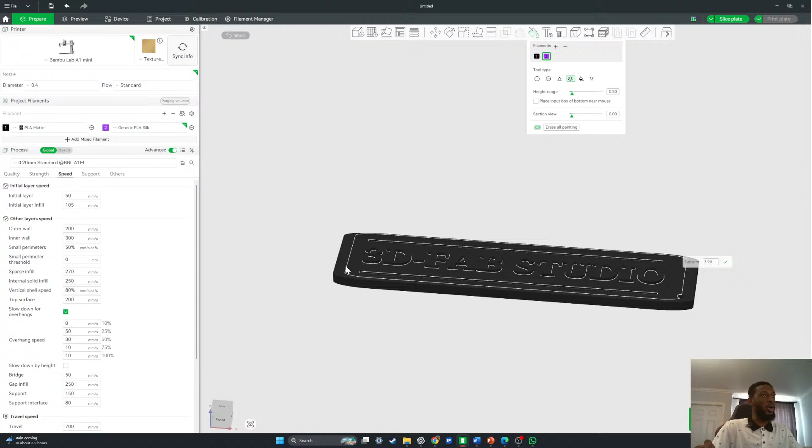So for the name, I want to use... I'll be changing this to purple, and I want to make it filled by the height range. So when it says height range, it's going to pick the top one first, and then go all the way down. Observe, just like that.

This little block here, you will only see this when you are mixing multiple colors. This enables the printer to switch from black to purple seamlessly so that you don't have a bad print.

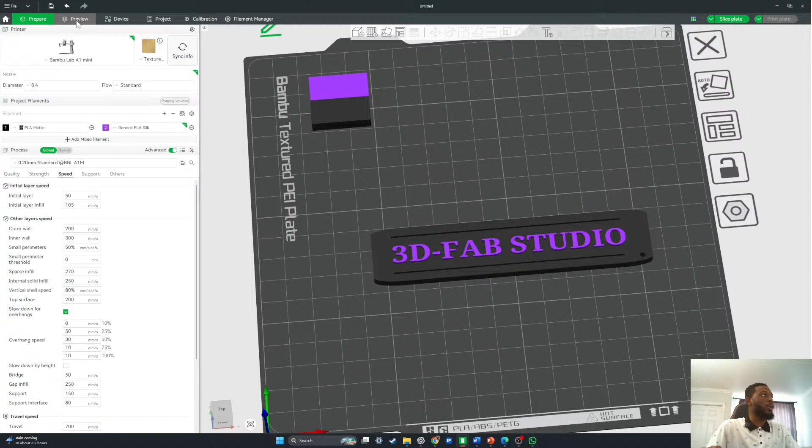So when I go into preview, you can see because we added another color, which is purple, the time increased from 18 minutes to 22. Because it's going to pick one filament, then drop the other, then pick another one, then drop the other, just like that.

So when this is done, what I will do is click on print plate. I'll click on print plates. And then it tells you the gram of the weight or the size of the material I'm going to be using. It tells you the time it's going to take, and it also tells you the filaments that I'll be using.

Also, this tells you the filament that I'll be using. So currently, I would love to send this into the printer, but as you can see, the printer is currently printing a phone stand, which I showed you earlier. That should be done in about 10 minutes or so. But if the printer wasn't busy, this is what I would do: I would send the job right here to the printer and have it printed.

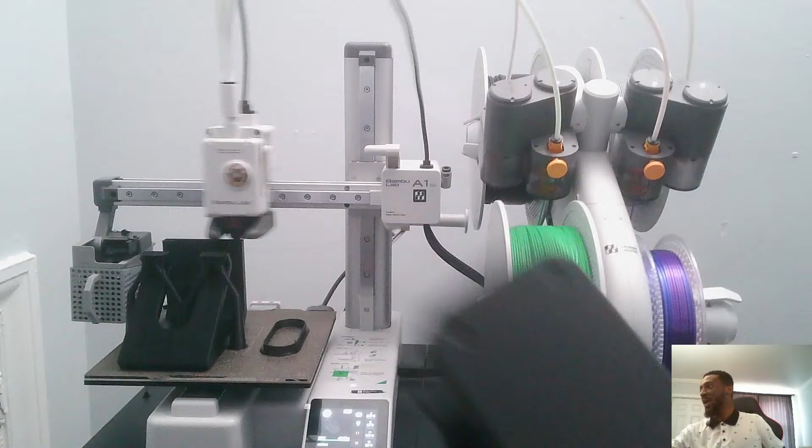Yes, you can add pictures, logos, anything you want to do. As long as you can think of it, you can most definitely add it. If I wanted to, I could have added my name or my logo at the bottom here, just to make it more customized, and the 3D printer will actually print it. So anything you want to do—if you want to make this to sell, you can add your own custom logo to it, which can give it more value or more aesthetic.

We're going into the economic side of this, and I don't want to talk about the economics yet. We'll save that for day two, where we can talk about profits, loss, material cost, and all of that. For today...

We'll be ending our topic today with the creation of the keychain. I really do hope that everyone was able to understand properly how all of this works. I'll be going back into our teachings today.

Let's continue talking about this. All right, so this is what we made today: a keychain. I was going to use this dimension, but it would have been smaller. But I'm glad that we used a custom one. Someone asked a question: how thick should a keychain be so it doesn't break? I would say somewhere between 4 and 5 mm.

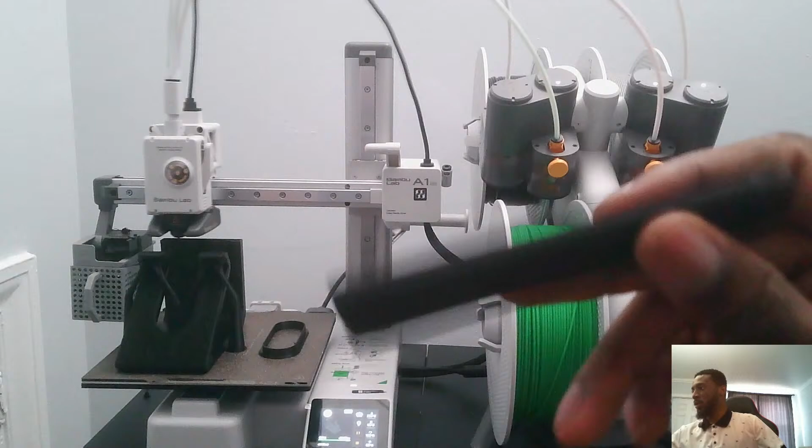And with our holes right there, as well as the wedges that we put in, every detail that you put in a 3D printer is going to come out, as long as the printer is printing properly. I hope that answered your question. So next, we'll be looking at various simple functional products that you can make with this.

I already showed you the phone stand, the cable organizer, the headphone holder, as well as the controller stand. If I turn into the printer cam, I can show you this cable organizer that was printed. All of these parts were printed and assembled with this. So your cables go in here, and you can hook it into the table and screw it in tightly. Everything, including the screws, were 3D printed. That's how precise it is.

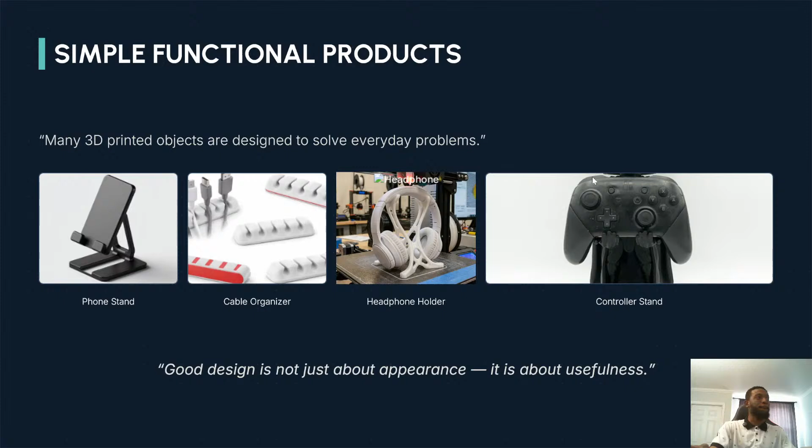So now let's talk about our common beginner mistakes. Like the questions that you ask, how thick should a keychain be so it doesn't break? You have to really understand your measurements.

Incorrect measurements will always lead to weak designs and will cause print failures. So you have to make sure that beforehand you have sketched and also designed properly what you are going to be making before you actually send it to a printer, so you don't waste materials.

I also have another question. It says, can you insert other people's designs, or do you have to make things from scratch? Absolutely, yes, you can. Actually, in Bambu Lab, if I go into Bambu Lab, you'll be able to see that I can actually check their online library and models.

So here is where you can see things that other people have done, designed, and created that you can print. There are so many designs, so many useful things. We have a headphone hook, a headphone holder as well, a table organizer. There's so many things that you can make. We have a book holder. It all depends on your imagination, basically.

So there are so many people designing so many things, and it's not just on one platform. There are so many other platforms that you can get what you're looking for if you don't find it on Bambu Lab.

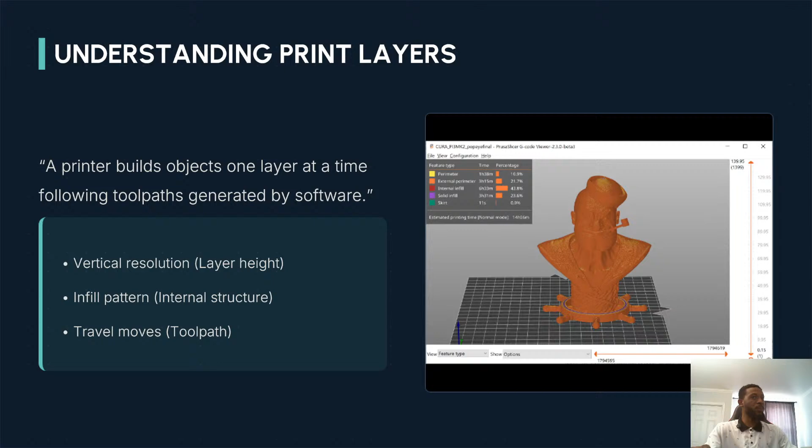I can switch to the printer cam just to give you an example. So you see that the printer started printing this from the base, and each time it finishes a layer, it goes up, controlling the z-axis, and that's just how it is.

It is pretty simple and straightforward. It's not a magical thing that just makes something from scratch. You have to start from the bottom and go all the way to the top. And with that, we will be coming to an end for today's session. During day 2 preview, we're going to be looking at advanced modeling and assembly, where we actually print a building. We're going to design a building in sections, making the wall, the roof, the base, and then eventually assemble it all together and send it to a printer.

Before this, you will see that I have already printed the 3D keychain from this course, and I will present it to you when we begin the next course, for day two. Day two is going to be all about advanced modeling and assembly, modular house, snap fit design, and multi-part structure assembly.

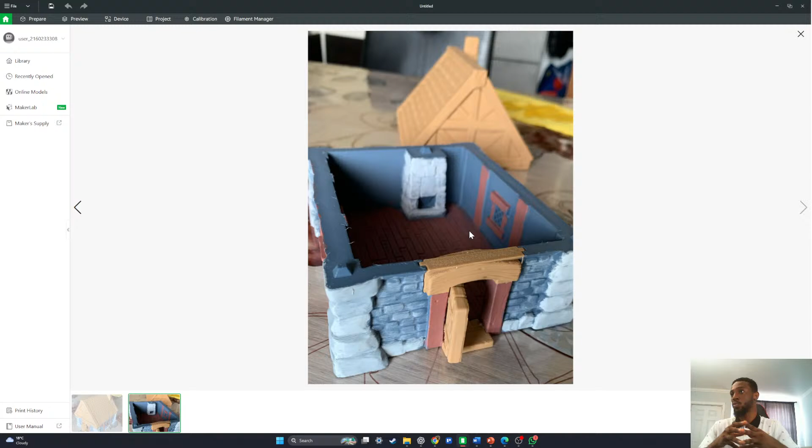Because the next class we're going to be using Autodesk Inventor, which is a more advanced software. With Tinkercad, it was a bit easy to use, but with Inventor, I'm going to have to spend more time with explanations. You will learn in the next session.

You will begin the house model, creating a house without screws or glues, and you will begin to think more like a designer and a fabricator.